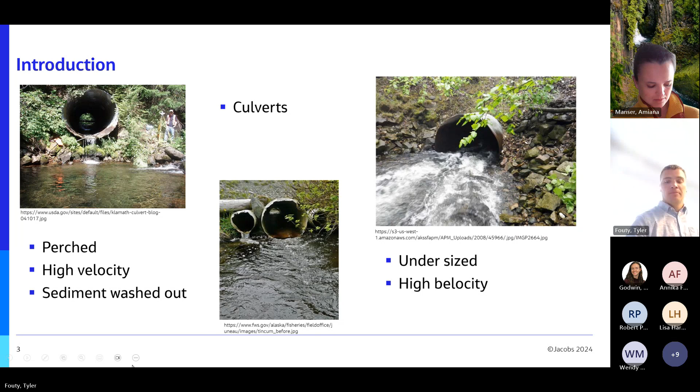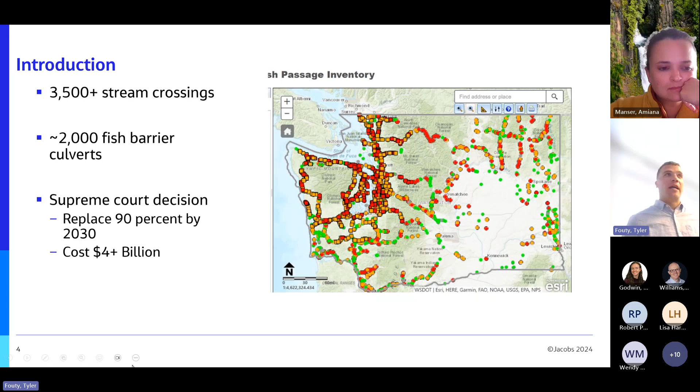In Washington State, there are about 3,500 stream crossings, and of these 3,500, there's about 2,000 fish barrier culverts. A Supreme Court decision in 2016 made a decision that 90% of these have to be replaced by 2030. The estimated cost is $4+ billion, I think it's more around the $7 billion range now.

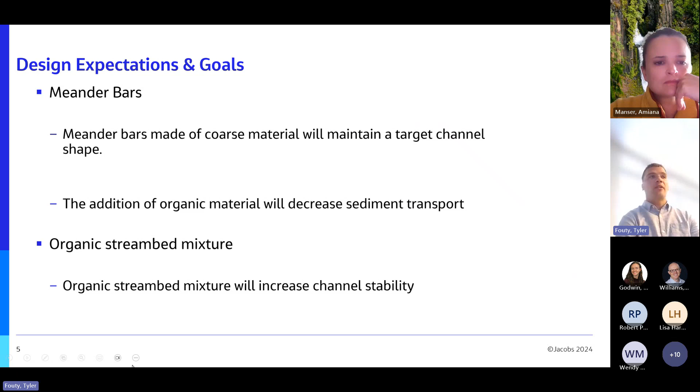Our next design is organic stream bed mixture. So mixing organic material into our stream bed mixture will increase channel stability.

So lab setup: the bottom picture is looking into one section of the Albrook Hydraulics Lab in Washington State. On the back far corner, you see a 75-foot long tilting flume that's blue, and it's 3 feet wide. We had a 20-foot section of stream bed material, and in that 20 feet we looked at the middle 10 feet of the study section to decrease boundary conditions. You can see the figure in the top right, looking downstream, we have those vertical slats to create a back pressure effect so our sediment wouldn't wash out. That boundary condition there will not impact our study section. We had the same setup upstream.

For the lab, we scaled to Fouty Creek by using the D50, and our scale factor is 7.6. That scales our flows in our lab. We could hit 0.2 to 4.2 CFS. Scaling that in the field, we could hit a 2 to 1,000-year flood event.

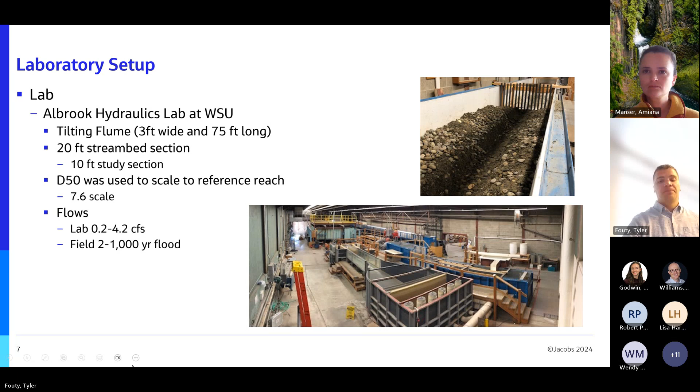To collect our data, we used a handheld 3D scanner. Doing this, we were able to collect about 4 million data points per scan, and it took us 3 minutes per scan. You can see on our left is our pre-flood event scan, and then we scan after our flood events. In the top right is our post-scan, and we can now subtract those two to see what the difference was in our surface bed. The blue was erosion, and the yellow color is deposition. We can see where it's occurring with all this detail about how these features will change the bed of the channel.

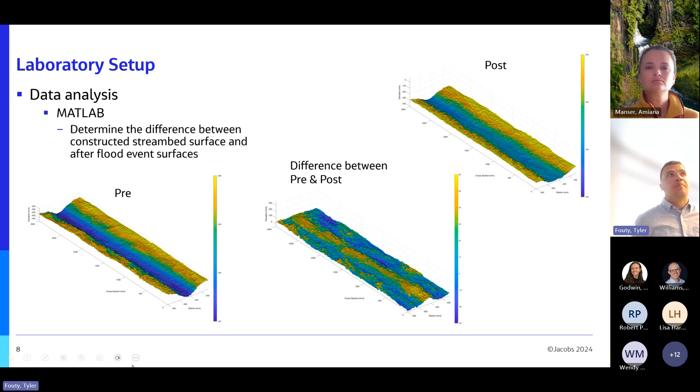Here's a little video of a time lapse of the day in the lab. We start off by stirring up the bed, then we just level it out. Then we dig in our desired channel shape. Here we're looking at deformable grade controls, so we construct it and put it all together. And then once that's complete, we'll take a 3D scan of the stream bed, and then we hit it with a flow event.

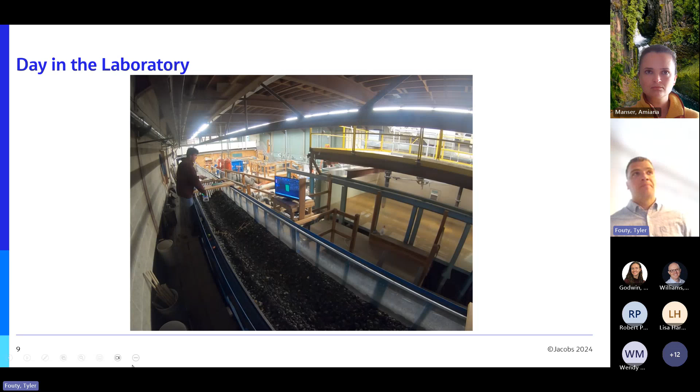This flood event will go up, build up to a 10-year flood event, and then we'd maintain it for 20 minutes. After 20 minutes, we shut it down, let it drain, scan, then we increase that to a 25-year flood event, then go up to a 50-year flood event. And then we tear it all down, and we repeat it for up to 3 trials, then we move on to our next design.

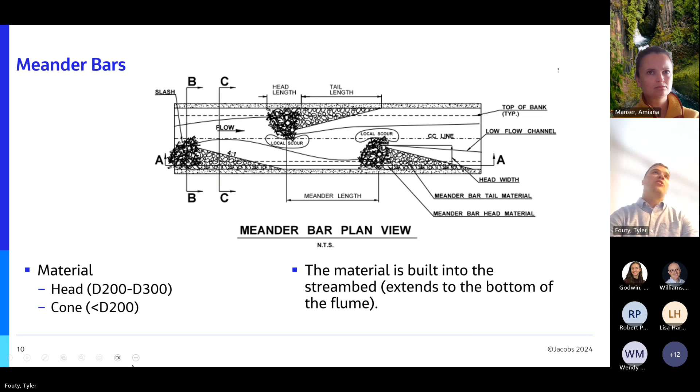So meander bars - what are meander bars? The figure on the right is meander bars that kind of wanted to mimic like a point bar. We want to be able to force a meander through our crossings. So we have this material at the head, looks like an ice cream cone cut in half. The head is made out of our D200 to 300 particle range, and then our cone, which is just downstream, is less than the D200 but greater than the D100. This is our basic design throughout this study.

Looking at meander bars, we had 4 designs. The first thing we want to do is see how this channel shape functions with just using stream bed material - that's design 1. Design 2 is now let's do that with coarser material, using that D200 to 300 for the head and the D100 to 200 for our tail. Our third design was leaving that coarse material, but then adding a root wad built into our system that was buried inside our meander bar. And design 4 is that coarse material with slash located just upstream.

So we tested these designs at a 2, 3, and 4% slope. For our 2% slope, we tested these at different spacings between our meander bar heads. We used the flume width as our scale factor, so we call that culvert widths - it's 1 to 3 culvert widths. But then looking at bank full width, that is 1.5 to 4.6 bank full widths spacing between these features.

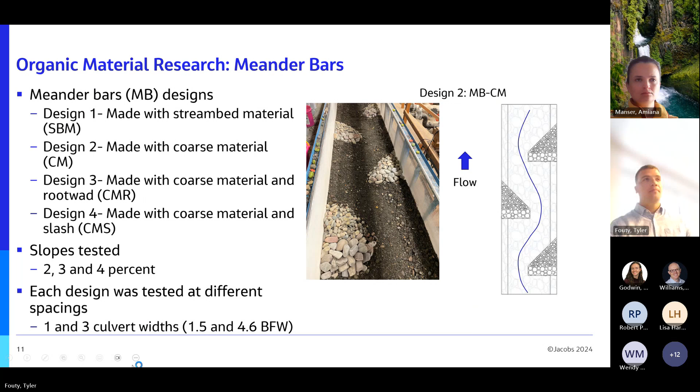So the figure on the left is our meander bar with a root wad, and you can see that's buried into our meander bar head. We wanted to do this to see if that log would be kicked out or not. So we used a scale down root wad - plywood cut circles, stuck them together, and wrapped it with a burlap sack to really capture that weight. We don't have the complexity, we just wanted the weight of it to be mimicked.

Design 4, figure on our right, is our slash material. You can see it's not incorporated in our meander bar head - it's just located just upstream, and it is buried at least half the length of these dowels.

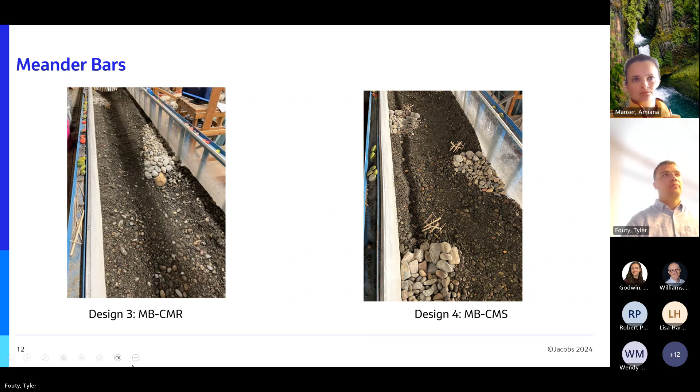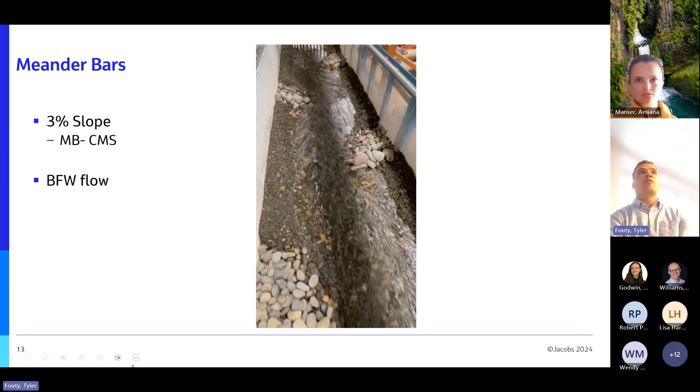Here's a video showing what the flow actually looks like going around the meander bar at a bankfull width. This video is taken at a 3% slope with our slash material. As you can see, it hits the head material and kicks flow to the opposite bank to make that meander, then goes down and hits the other one, actually creating that meandering stream at a bankfull event.

So our results are looking at the stability of our channel, and how much stability was increased by adding coarse material, root wad, or slash. Our zero on this graph represents just using streambed material. We can see that by adding these three designs, we increase stability in our channel.

We see that adding organic material increases stability compared to not having organics. Our MBCMS, which is our slash design, had an increase in stability for each flood event, with blue being a 10-year, red being 25-year, and orange being a 50-year flood event.

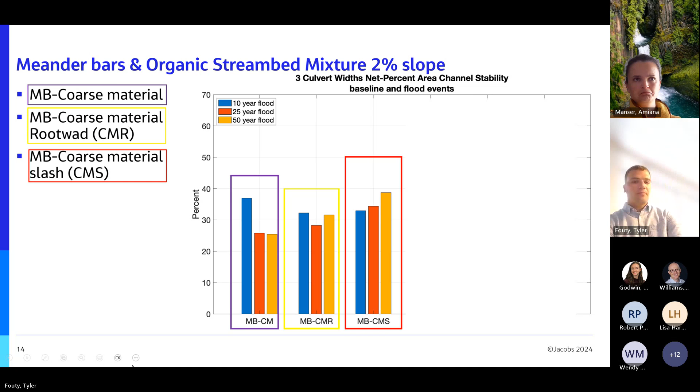Looking at our scans, the top row is right after construction, our baseline scan with no flood events, and the graphs on the bottom are after our 25-year flood event. Looking at our streambed material on the far left, this is baseline, and we can see that we lose that meander bar feature. We had erosion along our banks and little deposition occurring in the center of the channel, so over time this channel becomes flat and plain bed.

Just by adding coarse material, we maintain that meander bar shape, with a little erosion on our banks and deposition in the center of the channel. We see this same process occur for both our root wad and slash designs.

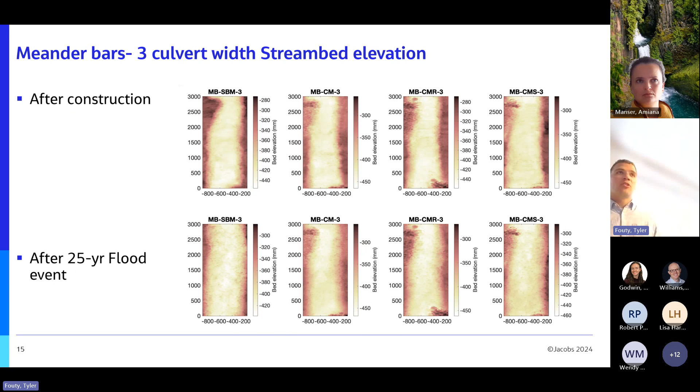Looking at exactly where this erosion and deposition is occurring, we can look at the difference plots. Outlined in white is the location of our meander bars. Blue shows where erosion is occurring, and yellow is deposition. We see erosion of our meander bar on the left bank, and deposition throughout the middle of the channel.

By adding coarse material in our meander bar head, there's little to no change occurring around it. We do get a little erosion along the edges, due to particles sloughing off from not being totally packed in during construction. We built these how you would in the field, not perfectly staged, treating it like running an excavator or heavy equipment.

They're just going to dump these in there, not making sure they're completely packed. So we wanted to keep it more natural to how it would actually be constructed in the field.

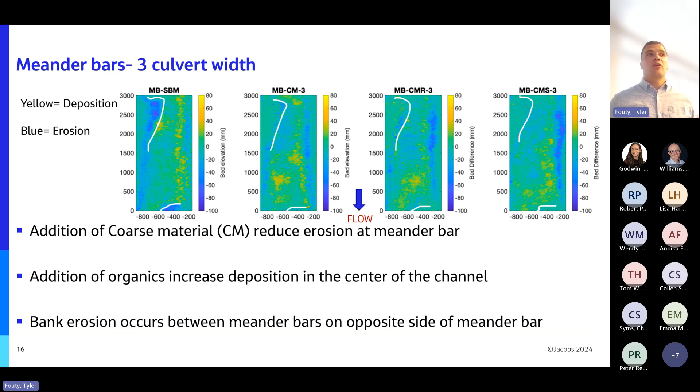We do get an increase in erosion along the left banks on the last two designs, due to velocity being pushed to that edge of the channel, as we saw in our previous video, as it hits the head and kicks velocity over to the left bank. So coarse material reduces erosion on the meander bar, but the addition of organics increased deposition in the center of the channel and bank erosion on the left bank.

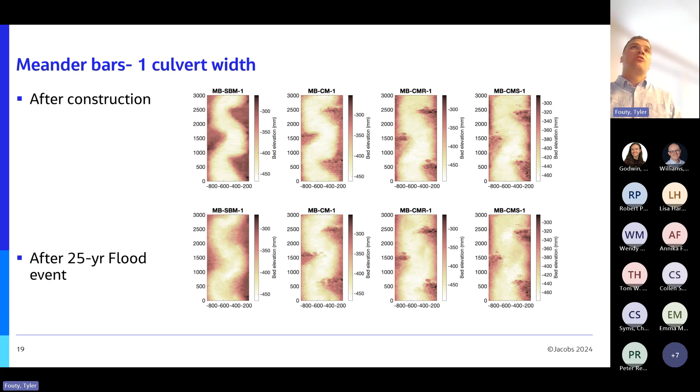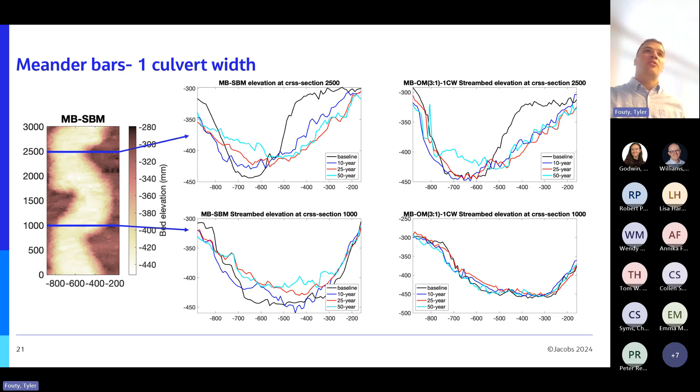By adding our designs, we see some erosion of our bank here, but it still maintains that same channel shape after a 10 to 50-year flood event. Looking downstream, we can see that the channel shape stays pretty much constant, maybe a couple millimeters worth of change throughout the whole channel.

At a 2% slope, we looked at adding organic mixture into our streambed. This was done as a volume ratio, mixing the whole streambed up, so we looked at different ratios of how much organic material should be mixed into streambed material.

We used 3 different organic materials. We used broom corn, which is a very small diameter material like old school brooms—ordered a bunch of that and cut it up, less than 2 inches in length. We also used 1/8 inch dowels and 1/4 inch dowels to represent our organic material.

We looked at volume ratios of 3 parts organics to 1 part sediment, a 1-to-1 ratio, and then 1 part organic to 3 parts sediment—so we had super rich organics down to very little organics.

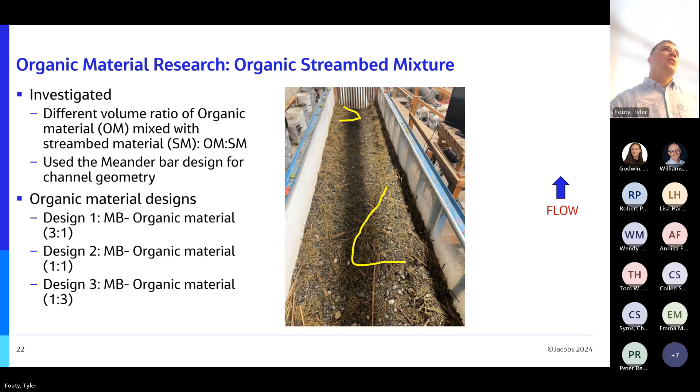Looking at what happens to our channel between each flood event, we see erosion along our meander bars using organic material, and then deposition occurring throughout the channel. This deposition is really just racking of this organic material that is getting caught up with the slash material above the surface.

We can see that we have a lot of that racking occurring for our increased abundance of organic material.

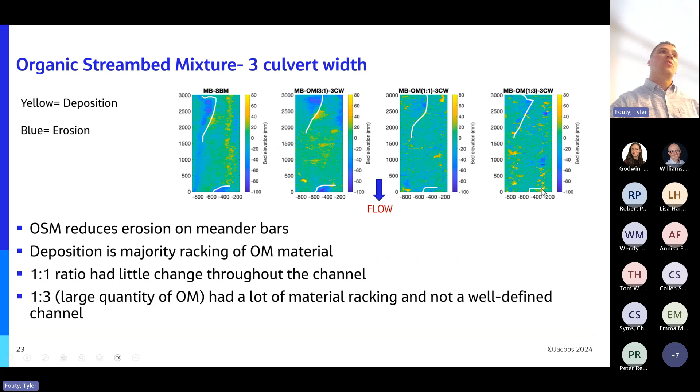Looking at our surface profiles, we can see that, once again, not having any features—just streambed material—we have a plain bed stream forming that has become straight. But adding organic material, we maintain that desired channel shape with erosion and deposition occurring throughout each of these designs. With the rich organic mix, the channel is very poorly defined because there's so much organic material inside this channel.

Looking at our cross-sectional profiles, we can see by looking at these two figures on the right that our channel shape is very well maintained throughout each flood event. Without these designs, we see massive bank erosion and deposition in the center channel, leading that channel to become plain bed over time.

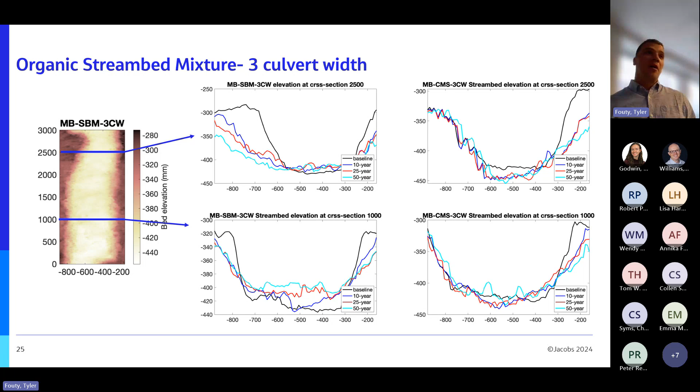Shrinking down our spacing between our meander bars to a 1 culvert spacing, we can see little to no change for our organic mixtures at a 3-to-1 and a 1-to-1 ratio. We do see some material start to increase in erosion at our 1-to-1 ratio, and we see racking on the opposite bank. Once we get up into our very rich organic mixture, we see a lot of erosion and massive racking of material in the channel.

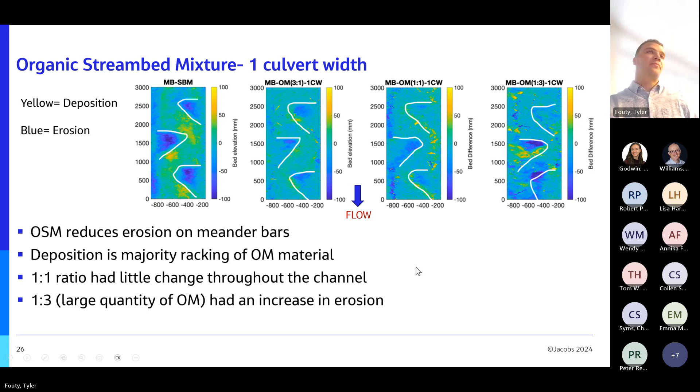Looking at the surface difference plots or surface elevation, the bottom graphs show our channel shape is being maintained. We do see an increase in our bed elevation for our 1-to-1 ratio over time. You can see that it's very noisy for our organic rich material.

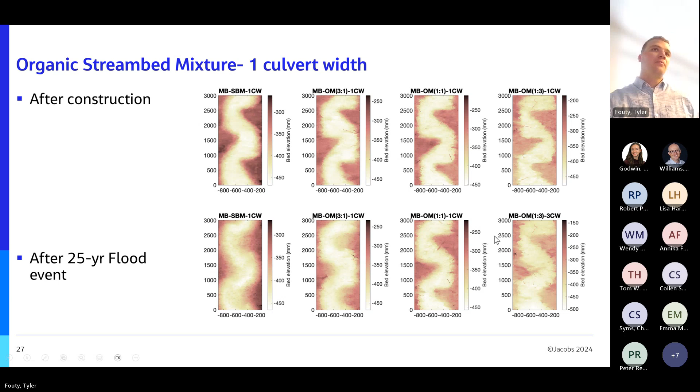Cutting across a cross-section through this, we can see bank erosion of material and deposition in the center channel for a 3-to-1 organic mixture ratio. But overall, our channel shape is maintained, and there's very little difference along our banks at a 10 through 50-year flood event at the upstream crossing. Downstream, we can see very little change, and it stays constant throughout the cross section.

Without having these designs, we have massive bank erosion on both sides and deposition in channel. For upstream and downstream, deposition is occurring, so this channel is becoming that plain bed form.

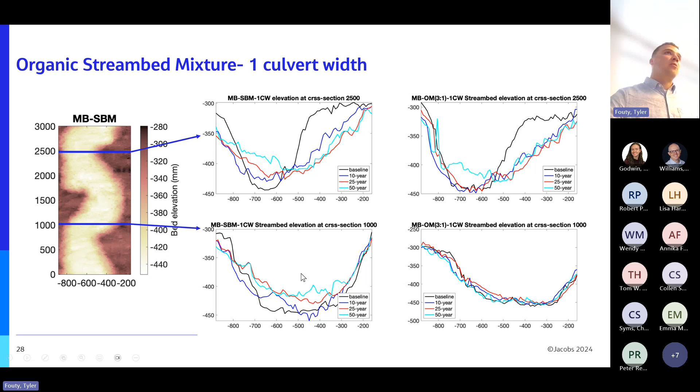Comparing this meander bar at a 2%, we're looking at organics versus not having organics with that coarse material with slash and root wad. We can see that just the organics, that very rich organics, has less stability than just streambed material. So we say stream organic should not have a mixture greater than a 1-to-1 ratio.

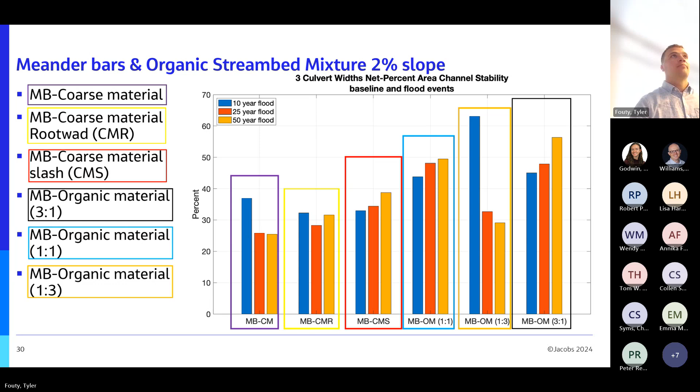At a 3 culvert width spacing, we can see that every design does add stability, more stability than just streambed material. You can see that a 1-to-1 ratio of organics has the most increase in stability for our 25-year flood event.

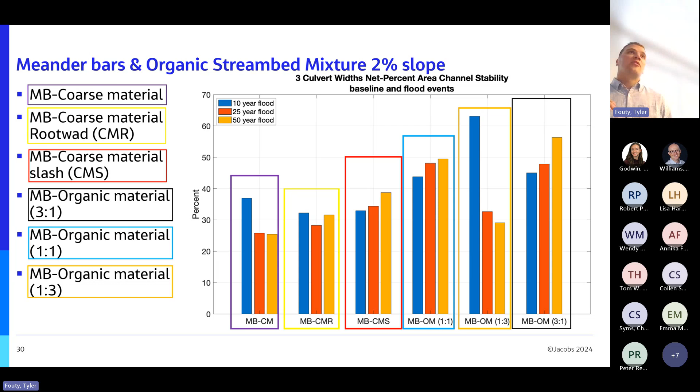Looking at a 10-year flood event, it is better than having just coarse material and slash. We see that increase for each flood event. So anticipate, if we went to a 75-year flood, are we going to see the same change, will we see stability increase with the higher flood events? But there's going to be some threshold where we won't see as much stability, so it'll be interesting to further test and see where this design starts to decrease our stability in our channel.

So we cranked our flume up to a 3% slope, and we tested this with just our original meander bars with coarse material, with root wads, and with slash. This was all tested at a 1 culvert width spacing. Our prior research proved that anything above a 2% slope shouldn't have a spacing greater than 1 culvert width.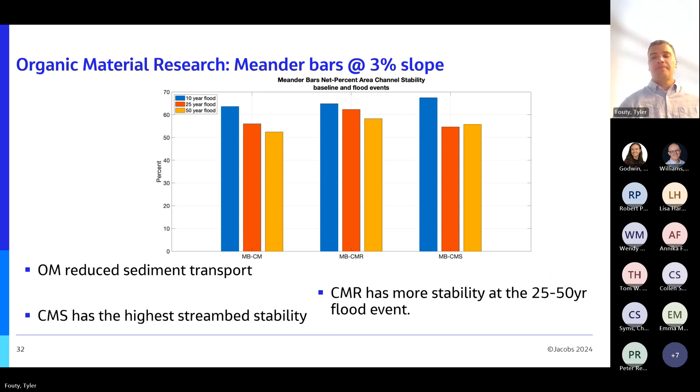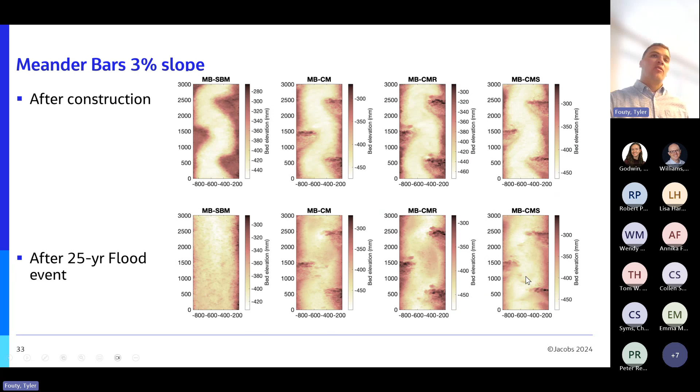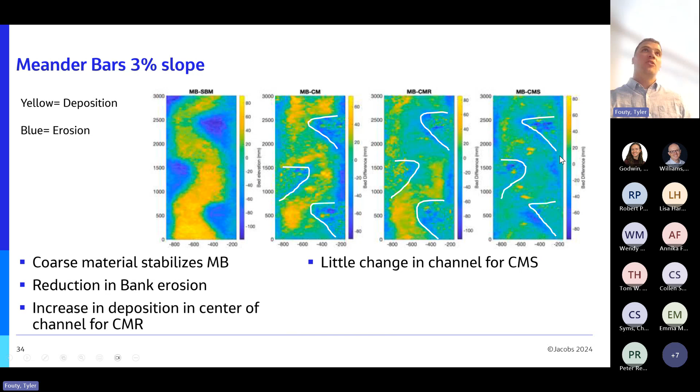But then adding the slash material, we kind of reduced that deposition throughout the center of the channel. There's a little bit of hot spots. We do get a little more erosion along this bank in between our left bank features.

So we increased our slope to a 4% slope. And over our previous research, we found out once we get above this gradient, we had to increase the size of our material. So we already knew that this meander bar with slash was determined to be our best design for our 2 and 3% slopes. So we kept with that design, but we wanted to change the size of the material in the cone.

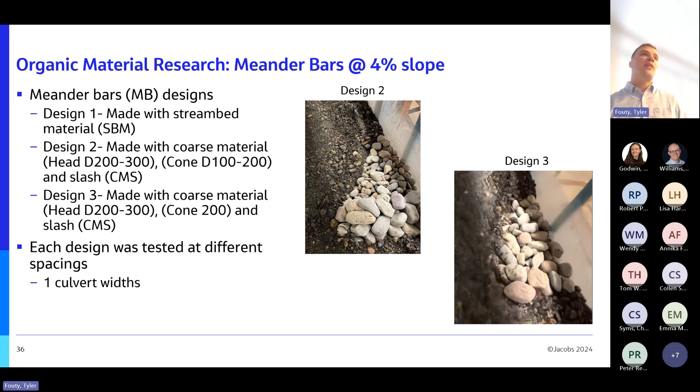So our downstream Design 2 kept the same material, that D100 to 200. And then for our third design, we increased that size to be particles equal to our D200. So we tested this at 1 culvert width.

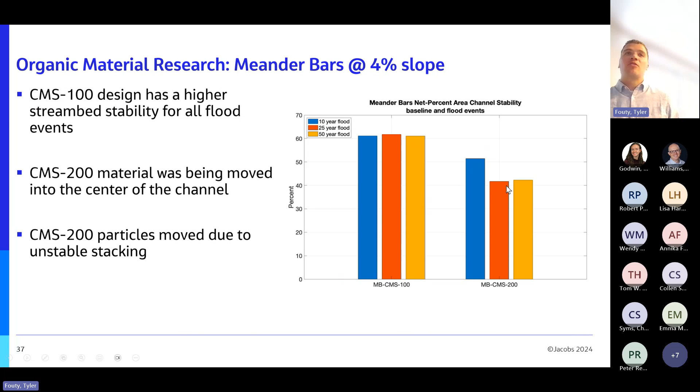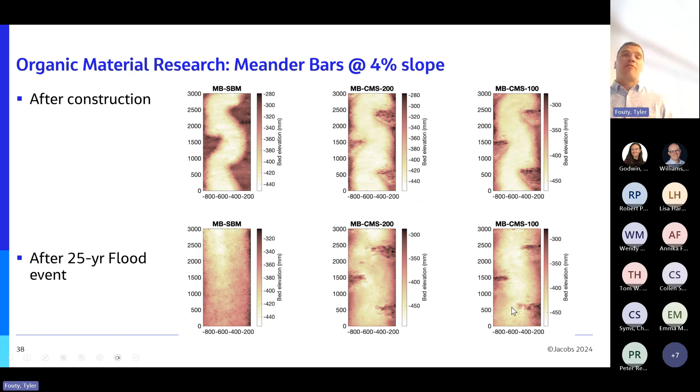And we found out why this was happening by looking at these surface plots. We can see that we started seeing these little bumps of elevation increase because these particles on our meander bar were being unsteady. There's saltation - they'd fall in the channel, and they'd move 1 to 2 particle diameters downstream and then come to rest. So after a 50-year flood event, you see these little bumps right around here. These particles were there in the same spot after a 50-year flood.

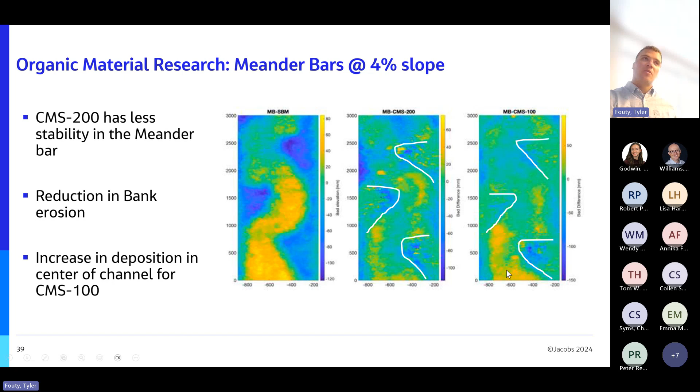So we do see a massive deposition occur right here because we had a lot of movement out of this meander bar head. They just fell into the center of the channel, and that's where they maintained through the trials.

So the conclusion of this research study was meander bars with coarse material reduce sediment transport and increase channel stability. Organic material increases channel stability as well. Coarse material worked great, but even adding just a little bit of organic material, like slash upstream or a root wad, increased channel stability.

And coarse material with slash was the best design, with the highest increase in channel stability. Organic streambed mixtures at a 1-to-1 ratio or less increases channel stability. Our recommendation is for a 2% meander bar with slash at a spacing of 2 to 3 culvert widths. For a 3% slope, meander bars with slash should be used. For a 4% slope, we keep the same design, keeping our tail material between the D100 and D200. We found that tail material equal to or greater than D100 is needed to keep stability through the channel and have the meander bar function as intended.

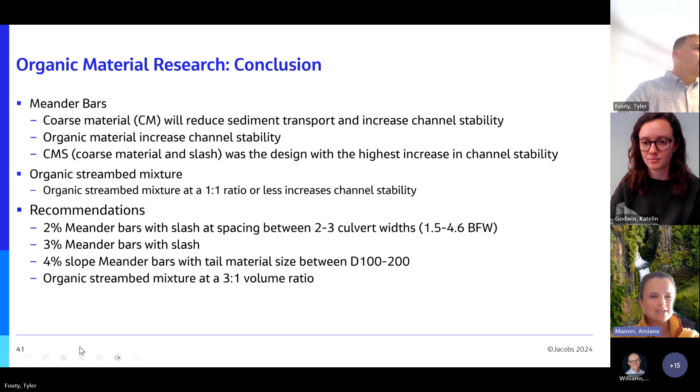Question from the comments: was the sediment gradation scaled down similar to how flows and channel geometry were scaled down? Yeah, so everything was scaled by length. Our D50 was our main source, and that had a factor of 7.6. That 7.6 was also scaled to the flow, so actually the flow scale factor was like 400 and something. So we did all that by length. So yes.